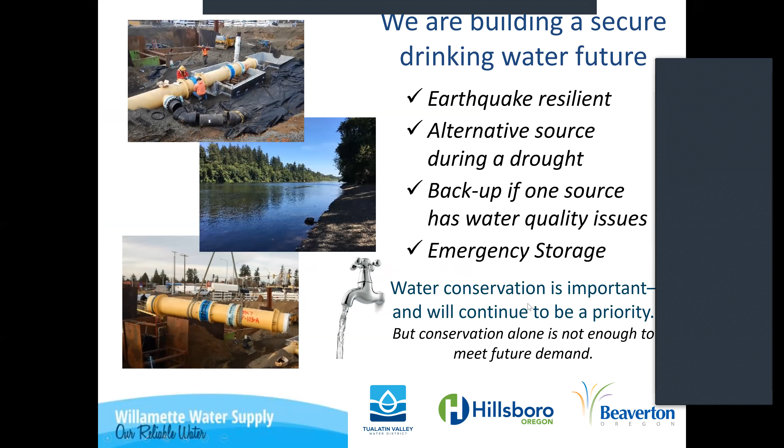Looking good, thank you. As you know, the backstory on our project is a very large water project. By 2026, our goal is to bring that water resource online to the partner agencies. Right now we're well underway, with a lot of pipeline in the ground, making our way through the project.

I won't focus on the system-wide project as much as giving you a quick refresher on the Metzger Pipeline East portion. Here you see an overview with the NAC map showing the different components. We're happy to partner with City of Beaverton in a couple ways, and we'll hear on one of the next agenda items about the road work coming up on Western. We're able to get our pipeline in alongside their project as a partnership, as a way to reduce community impacts by combining our construction efforts.

So that will be one phase of work coming up, and for the most part it'll look seamless, just like the roadway work, with the pipeline going alongside it. Also, City of Beaverton has a water line they need to put in the area, so we'll be installing their water line as we're doing Metzger Pipeline East.

To get your bearings, the pressure flow control facility is located down on Hall Boulevard at the corner of Hall and Oleson. And then you see that western area, just to get your bearings on the northernmost end. That's really our first phase of work for the Metzger Pipeline East.

We'll go out to bid on the center portion of this work that goes through your NAC. For the most part, it's imperative we get ahead of the 217 work, so really the first year of our work is going to be focused on everything south of Hall Boulevard. The soonest you would see the pressure flow control facility work on Hall might be around spring of 2022, just to give you some bearings there.

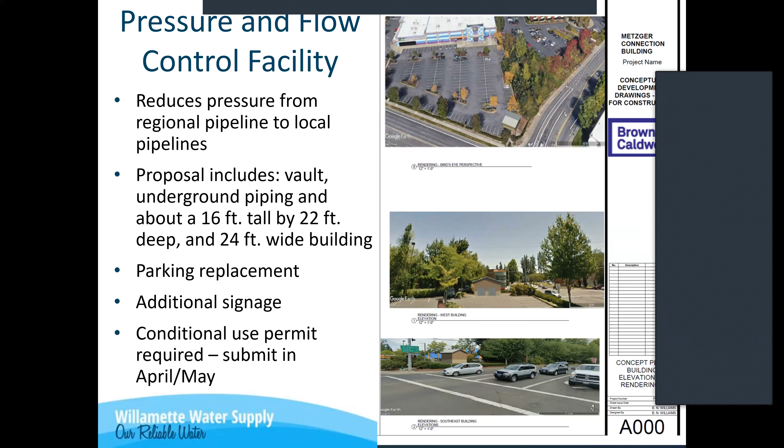So as David mentioned, this work will not start till spring of 2022 at the soonest. We won't know exactly when until we get a contractor on board, hopefully in the next couple of months, and they provide us a schedule and we can work through that. And that's David's prompt to say, hurry up, Brendan, keep talking faster.

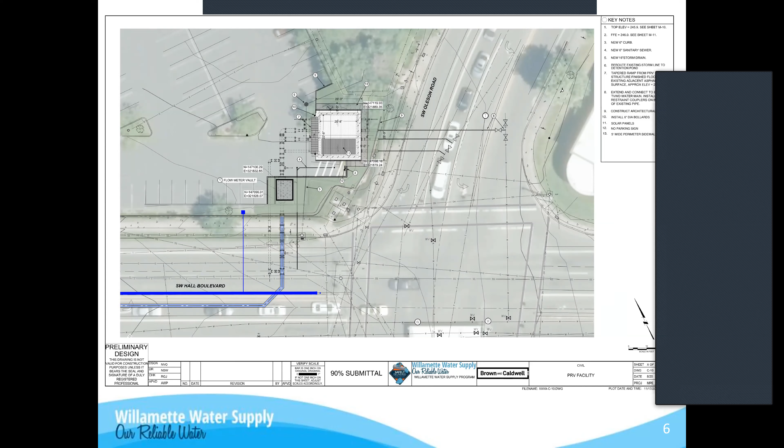This is a site plan, just showing where the building is located, and there's an underground vault there in the bottom left. The blue lines are the program steel pipe that's coming into the facility. Then up to the right, it's where we tie into the existing piping to serve TVWD customers and also the emergency intertie.

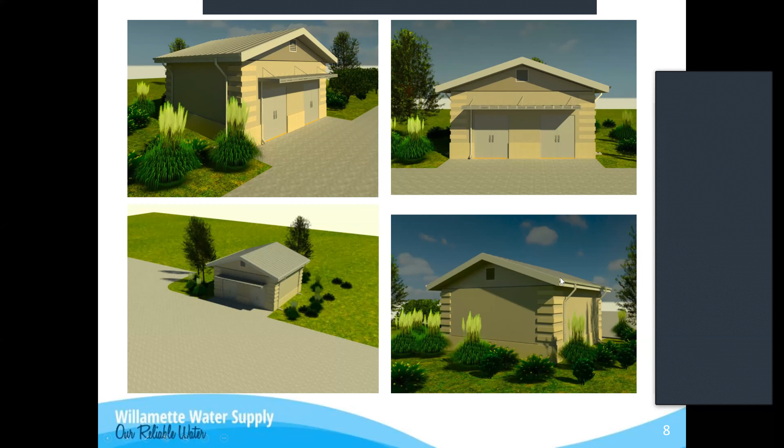And that's really all I had. Does anyone have any questions?

The work when it goes to Scholls and over to Allen, what is that going down the middle of the right of way?

Down Scholls to Allen, it's a mixed bag. We try to stay one side or the other. A lot of our alignment is dictated by what's already in there, how we need to maintain traffic and keep our workers safe. As you all know, that is a very busy road. So each section, from intersection to intersection, is very different.

For example, in front of TVF&R Station 53, we had to do something different there to make sure that they have access and they can get out on a call without interruption. So it's not a standard pipe stays in the middle or pipe stays to the side. We had to meander a little bit, and that's what makes things tricky.

And in some cases, it'll be night work where there's just way too much traffic volume for us to be working during the day.

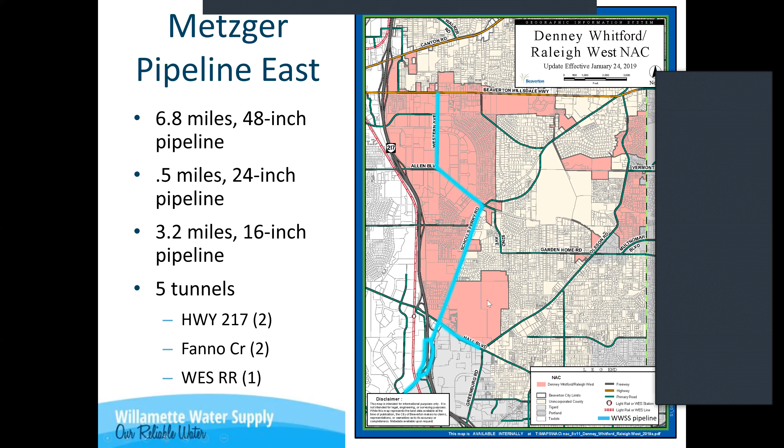All right, on that, thank you. I guess one other question though, when they do, will they resurface the whole street?

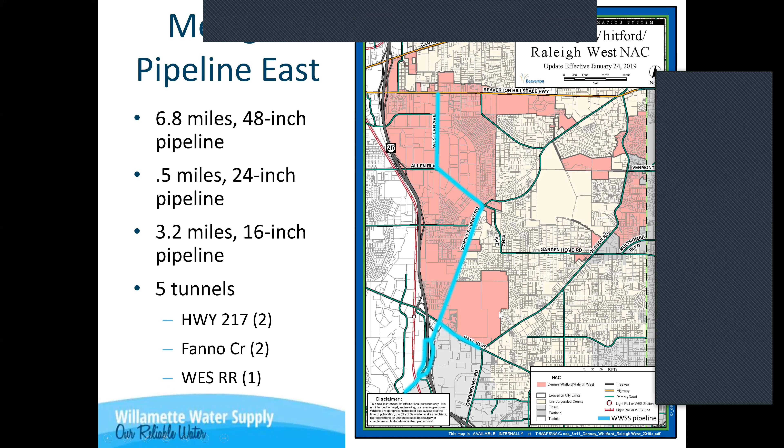Not necessarily the whole street. Definitely there are requirements where we don't leave, like, travel in wheel lanes. We definitely would go as far out as we can. We typically would go to where the lines are, or maybe to the curb even.

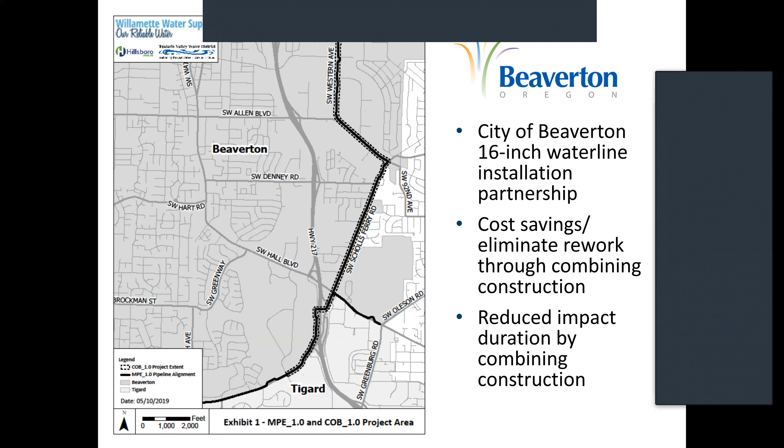I think Beaverton has like a 3 foot requirement, and Trevis is on, he can tell me what exactly it is. But no, it's not necessarily the whole street that's going to be repaved. It's where we have dug up and to a point where it's safe and it doesn't unravel with the existing pavement.

So anyone that wants to get a better visual on some of the work, you can go to our website at ourreliablewater.org. And then there's a Metzger Pipeline East page, so you would just go slash MPE and that'll take you right to the Metzger Pipeline East page. We have a Google Earth tour of the alignment areas, and we refresh a lot of that information periodically as well.

Excellent. All right, thank you. I just saw a question about the projected dates of construction.

Yeah, I'll just run through that real quick. The pipeline work starts, we're bidding it at the end of the month. So 3 months from then we would start doing our submittals. So it'd be mid-year when we start our construction on the pipeline south of Hall.

And then, as far as the facility goes, not till spring 2022 before we start that work.

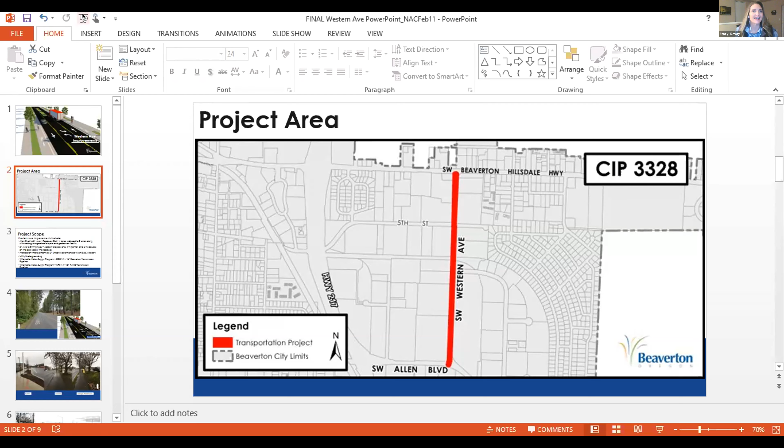Oops, second here. All right. Rick, can you give me a thumbs up if you can see this? All right, great. You're the second person on my screen that I see, so that's why I should probably move this arrow down so I can see Trevis, that way I can bother him a little bit. No, just kidding. All right, so I'll go ahead and start from the beginning here.

Now, this particular section, and we'll get into this a little bit later, the Western Avenue Improvement Project is from Allen Boulevard up north to Southwest Beaverton Hillsdale Highway. However, the previous picture that you just saw is only for a portion of this segment of the project, on Western Avenue from Allen Boulevard to 5th Street.

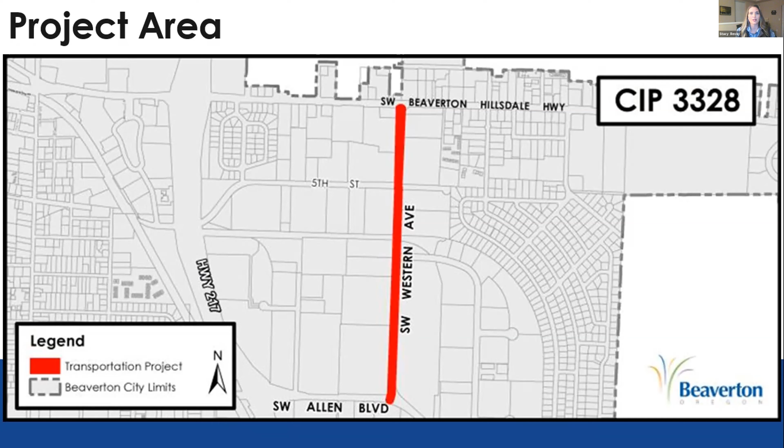And then from 5th Street to Southwest Beaverton Hillsdale Highway, there will be an added 5-foot bike lane, 4-foot planter, and 6-foot sidewalk on the east side. If you all remember, Kaiser had a redevelopment, so there's a 5-foot bike lane that exists on the west side of the road and also a sidewalk.

So the project scope, as I mentioned, Western Avenue improvements include from Allen Boulevard to 5th Street, the roadway diet, reducing the roadway we saw in the first picture from 4 lanes to 3 lanes, adding a separated bicycle and pedestrian facility. And from 5th Street to BH Highway, we add a 5-foot bicycle lane, a 4-foot planter, and a 6-foot sidewalk on the east side of the roadway, matching the already improved street on the Kaiser side.

Intersection improvements at both 5th Street and Western, and also Allen Boulevard and Western. Utility undergrounding, and the Willamette Water Supply Program.

As David had mentioned, we are coordinating with the Willamette Water Supply, really wonderful support and coordination with WWSP and TVWD. City of Beaverton has a 16-inch water line going in simultaneously, but WWSP will be putting that water line in the ground, as well as the 48-inch TVWD transmission pipeline. So we're coordinating on 2 different things, combining construction efforts, which will be better and easier for the neighborhood, so we don't have to tear the road up repeatedly. There are really 3 wonderful things going on: the road improvement project, the 16-inch water line, and the 48-inch water line, all combined together in a very coordinated effort.

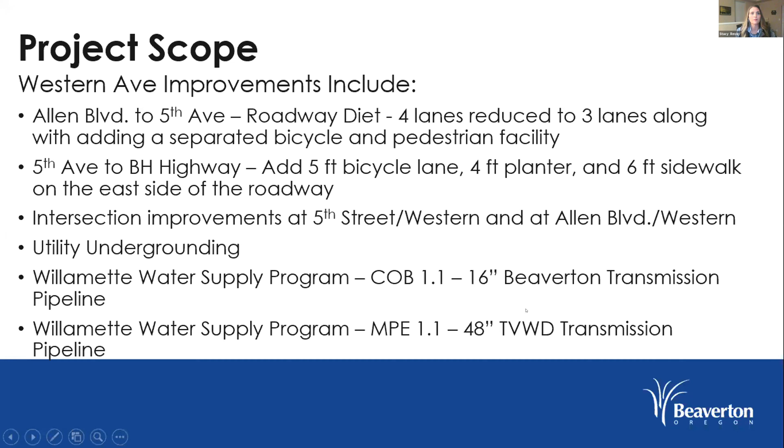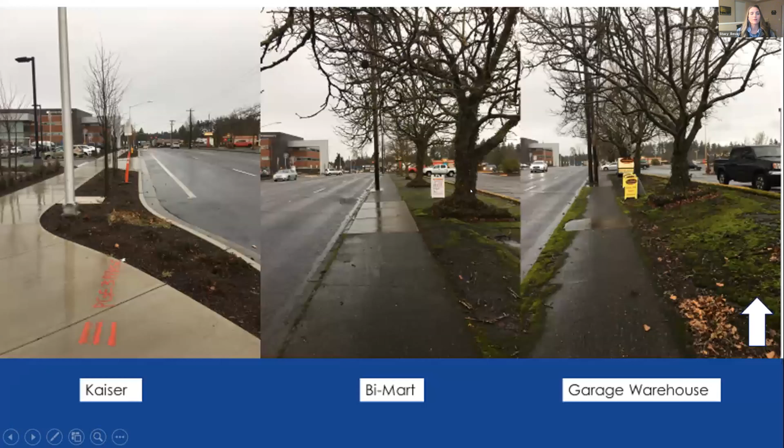Okay, Trevis, I will have you start your wonderful part of your presentation. Okay. Stacy got all the cool graphics, though. I just get the pictures. So, yeah.

This really, we just want to put a few things in front of you tonight, and one of the primary purposes we're bringing this information to you is to let you know the project construction is coming here soon. So again, just for reference, this is towards the north end of the project. We would be standing north of 5th Street, looking north towards Beaverton Hillsdale Highway from these 3 photos.

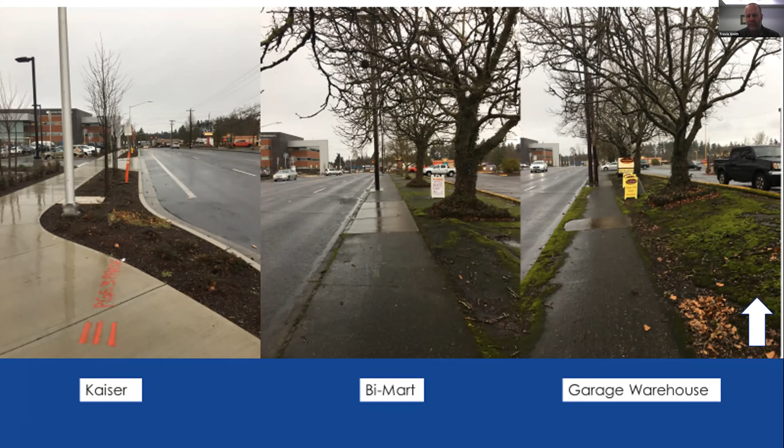So the left photo, you can see Kaiser there in the distance. And what you see there is the improvements that we will be implementing on the east side of the road, on those 2 pictures on the right. So you can see that we've got that separated sidewalk, we've got the planter strip and that bike lane. And so that's what's going to be implemented on the right side of that project from 5th to the north. If you want to jump to the next slide.

So within these just a few graphics and pictures here, we're showing what the final product is going to be like, but really a lot of the work that is going to happen to get us there is going to be underground. And as we've mentioned several times now, the partnership that we're doing with the Willamette Water Supply Program is a significant aspect of this project.

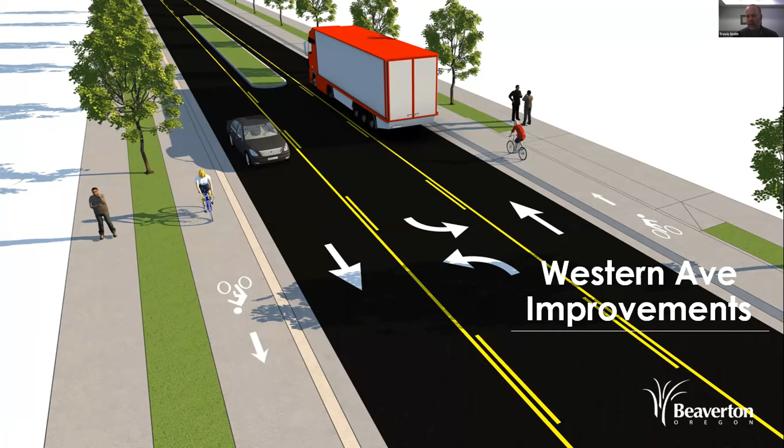We're actually going to be regrading outside of that proposed street section that was on Stacy's slide, which shows the sidewalk jutting out quite a bit further than it is currently. We're going to be regrading a roadside ditch through that area on the west side, in front of industrial paper. So the majority of those trees, if not all of them, would come out. On the east side, quite a few of those are coming out, but not all.

Okay, because I know there's a berm that runs up into that other industrial area on the east side. That's why I was asking about those trees versus what you've got in the photo. So both areas will open up significantly where you'll actually be able to see all the industrial buildings. Right.

There will be trees replanted though on both sides. They're going to be street trees, basically ones that you see throughout the city. Right, so it's going to look significantly different. It will open it up a bit, but there's still going to be some screening there for the industrial sides.

Okay, and then this is all tied to the rebuilding of the intersection and that turn from Allen going onto Western, right? Correct, yeah. That's part of this project as well. Okay, great, thanks.

Okay, were there any other questions? Thanks, Rick, good question. Yeah, it looks like there's one in the—oh no, that was for something different. All right, no, I think we're good for now. It'll be interesting to see that.

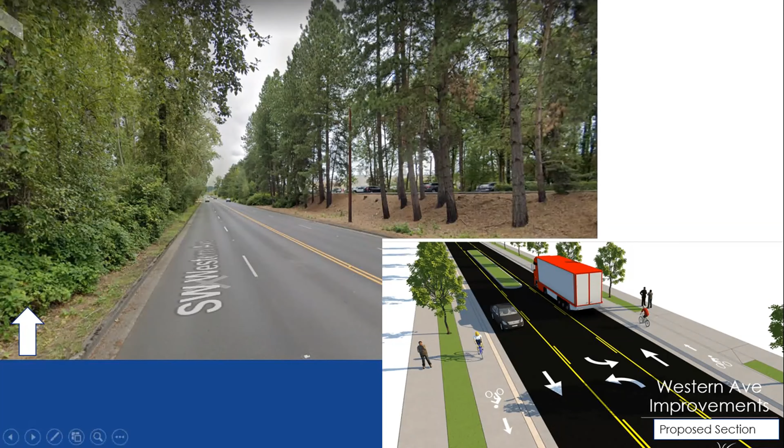I know the Traffic Commission has seen some of the changes in that as well. Rick, do you have a question? Is that—all right, just double checking.

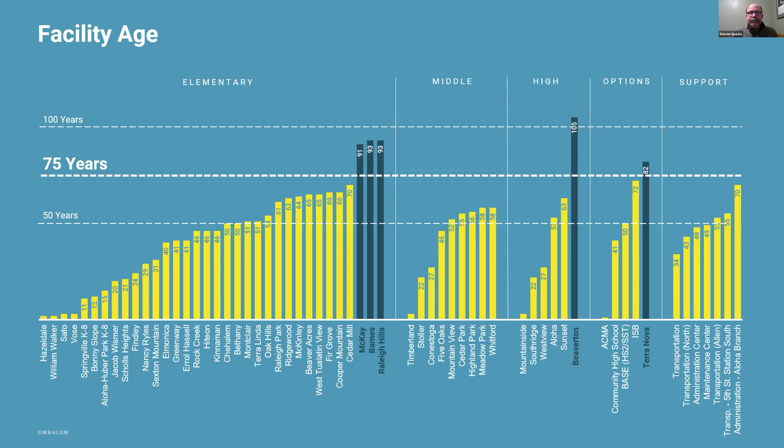So you again can see Raleigh Hills is one of our worst performing schools in terms of the assets - they're really old, they need to be replaced, and there's a lot of them. Beaverton High School is also fairly high, and that's what you would expect for a 105-ish year school. The thing that makes Beaverton High School relatively good is that in 2002, a lot of bond money was put in there to create a new cafeteria building. So a lot of the equipment there is new, as opposed to like Raleigh Hills, where it's not.

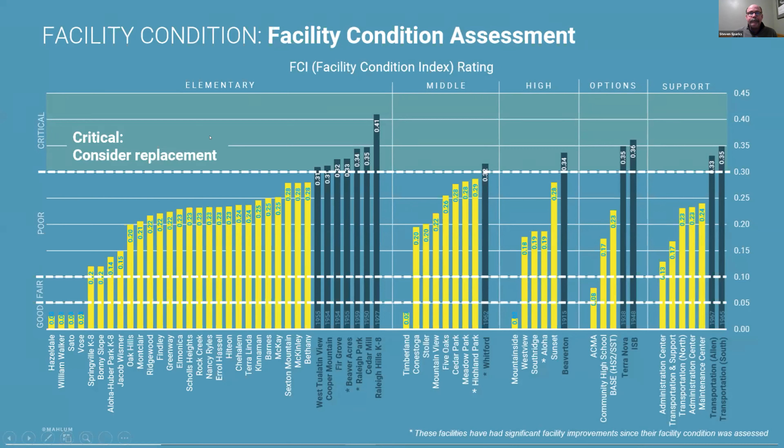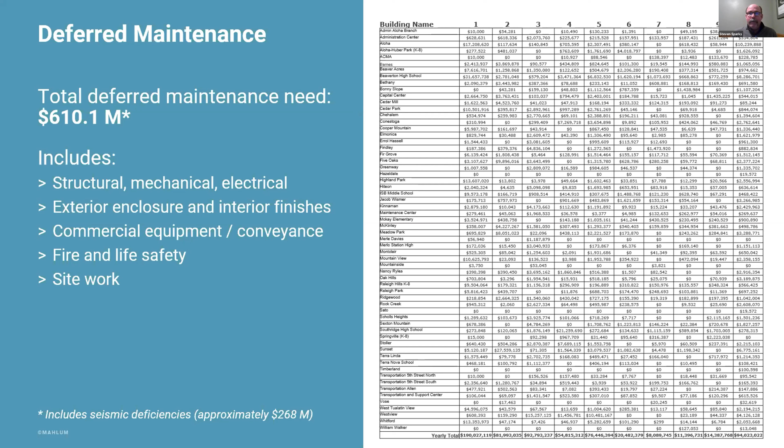McKay, Montclair — you can see they also received some investment, but those were mainly in terms of technology improvements, whether that's new wireless, new phones, badge access for security purposes, things like that. So our key takeaways here are: we've got 2 buildings that we really need to replace, as well as a number of schools — 10 facilities — that are in our worst category seismically that need attention. And of course, we've got that large deferred maintenance tab that's out there.

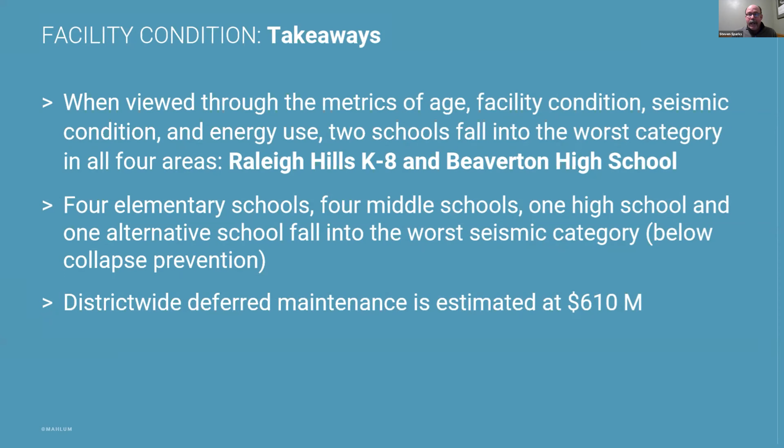In our planning effort, we're looking at 2 different plan options — really bond options — in terms of how we fund the improvements we know we need in the district. The first option is the traditional one the district has always done: ask voters to support and approve a renewal of a bond that is expiring. The result is no increase in taxes. So if you're paying $2.60 per thousand from the school district, you would continue to do that — it just wouldn't drop with the expiring bond. That would generate about $325 million.